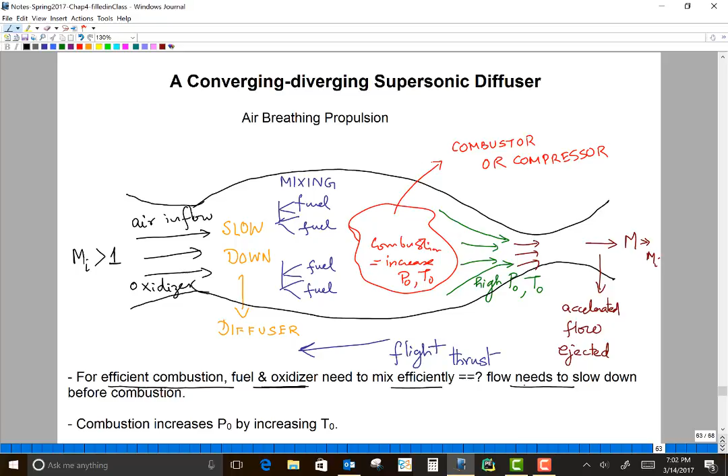So the essential issue in air breathing propulsion is this, right? You're taking in air from the outside, and this flight is already operating at supersonic speeds, say, okay? So then it is taking in air that is at supersonic speeds. And for combustion to happen, for the combustion process to be efficient, let me write it, let me underline these lines. For efficient combustion, this fuel and this air need to mix efficiently, which means the flow needs to slow down. Only then they can efficiently mix with each other.

And obviously, once the air slows down, it can mix with the fuel and undergo combustion, which increases T naught, which in turn increases P naught. This P naught accelerates the gas through the converging diverging nozzle, thus converting a large stagnation property isentropically into a larger amount of kinetic energy because of the nozzle. So that's what we learned, right?

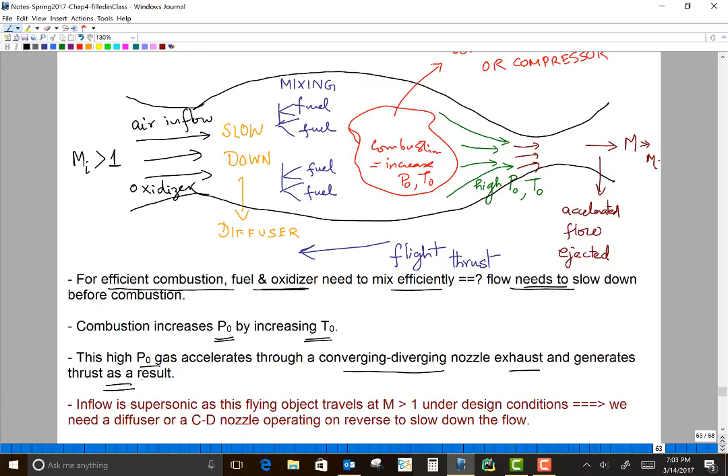The Mach number is essentially the relative proportion of kinetic energy to internal energy. So this gas that just underwent combustion will have a lot of internal energy, and now you push it through a converging diverging nozzle, it's going to convert a lot of that internal energy into kinetic energy, and hence a lot of momentum and hence thrust. So that is the essential idea of a converging diverging nozzle based thrust generation system, and generic idea for any such propulsion systems. So the inflow is supersonic, so you need to slow down the flow.

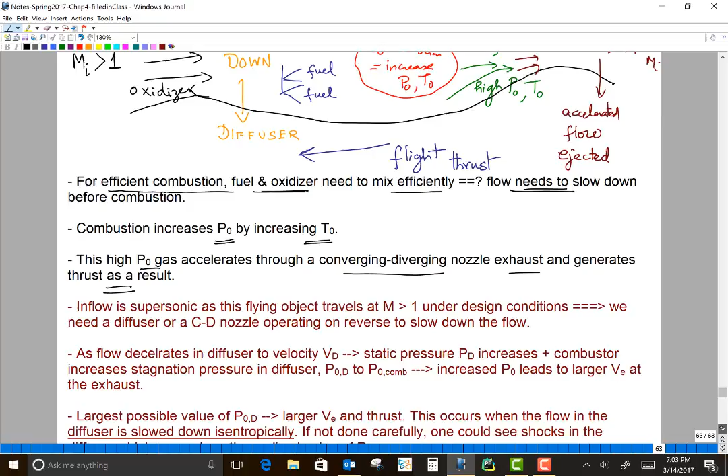And what are the mechanisms that you can slow down the flow? You can just block it, right? I mean, you can just block the flow. And as you block the flow, or you can constrict the flow, it's not going to be that easy because it's at supersonic speeds, so it won't sense the constriction. So the only response this flow is going to have is to undergo a shock and convert the flow into a subsonic flow behind the shock, which in turn is going to sense this constriction and try to slow down.

The problem with this approach is you want your combustion process and the energy addition process to be efficient, right? So now you have this inflow that just underwent a shock to slow down, which means you're losing a lot of the P naught or the stagnation pressure associated with the inflow.

Now you lose a lot of this P naught, then you take this residual flow with reduced P naught, then you need to add that much more fuel and burn that much more fuel to increase the P naught to the value that it originally had, the value of the incoming flow. Okay, and then on top of that, you need to burn more fuel to increase the P naught further, so that you can generate increased momentum and hence increase thrust.

So the basic idea here is, how can we slow down the flow efficiently without losing any of the P naught that is inherent in the flow, that is generated because the flight is already operating at supersonic speeds, right? So you don't want to lose all that incoming momentum. You don't want to kill all that incoming momentum in the air.

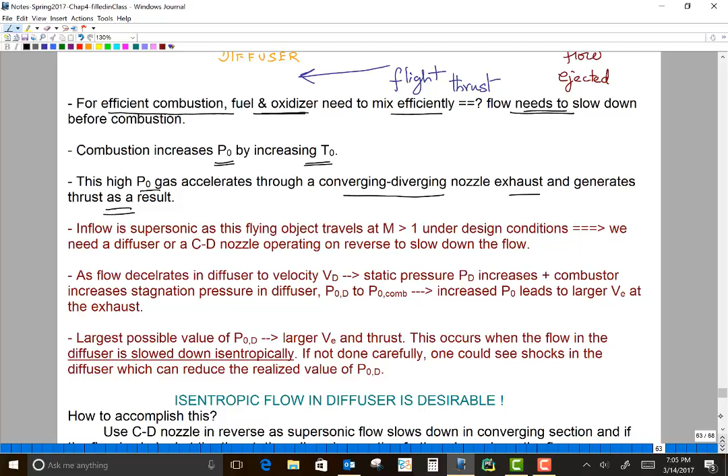You want to store it as internal energy, and the way to store it is to isentropically slow it down into a stagnation state. And how do we isentropically slow down the fluid? The way to do that is to use a converging diverging nozzle in reverse.

So which means now you have supersonic inflow and you have a converging section. The supersonic inflow is going to slow down through that converging section, and if it is operating at what is called a design condition, then you could in principle choke it at the throat, and then in the diverging section, the flow can either accelerate or decelerate, right? And most probably in this case, it is going to decelerate further into subsonic flow, simply because the back pressure in the combustor is going to be high enough to warrant a subsonic flow.

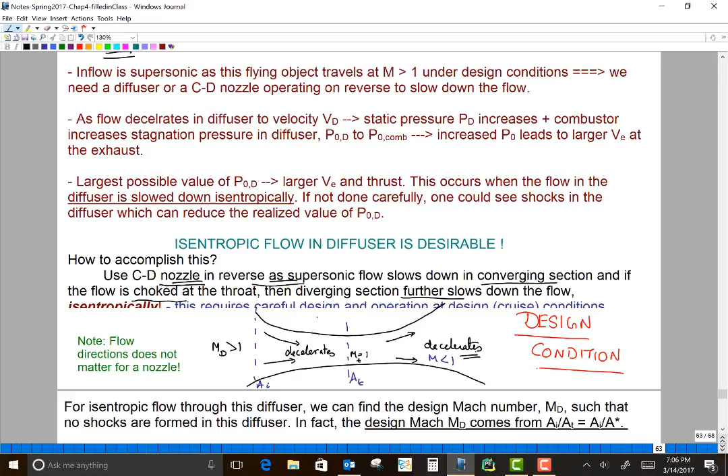So when that happens, the flow is going to slow down isentropically into a subsonic flow, and at that point you can have a very efficient way of mixing the fuel and the oxidizer so as to have a very efficient combustion process. The problem is the following, okay?

So if you're using a nozzle like this, then there is a design Mach number, MD, that is associated with the nozzle, right? If AI is the area of the inlet and AT is the throat area, then this AI by AT is going to give you the nozzle shape, and there's a characteristic supersonic Mach number associated with this nozzle design, that you can get from your isentropic flow tables. So for isentropic behavior, this AI by AT will give you a design Mach number. In any of your problems, your design Mach number MD and the area ratio AI by AT are equivalent pieces of information.

And so only if the flight is traveling at this design Mach number would this nozzle work, because then it is operating at the design Mach number, which means this nozzle designed for this Mach number can isentropically slow down this fluid. However, it is not possible to operate under design conditions all the time.

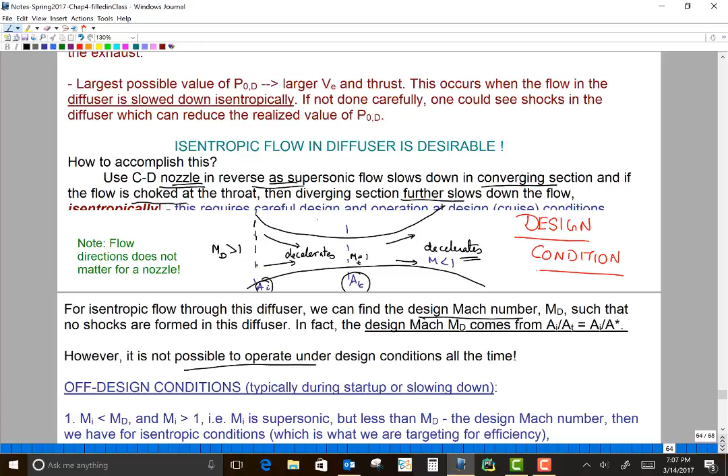For example, one of the most prevalent off-design conditions is what occurs when you typically start up the flight, or when you're trying to slow down from your cruise speed, okay? So either you're accelerating towards your cruise speed or slowing down from your cruise speed, right? So what happens? It is at these times that the combustion process becomes very inefficient. And in this day and age, when there is so much effort to reduce carbon emissions and all that, then this becomes a key issue, okay?

So let's look at the situation when you're operating in an off-design condition during the startup phase, which means let the flight be operating at a Mach number MI, which is smaller than the design Mach number, right? Okay, so the design Mach number can be viewed as the cruise speed. And this MI is something smaller than the cruise speed, but this MI is supersonic, so it's greater than 1. What happens if it's subsonic? Then subsonic is not a problem, because subsonic can sense this obstruction from the combustor, and it can slow down accordingly and isentropically.

The problem with this is always with the supersonic flows, because a supersonic flow cannot sense an obstruction, and if there's an obstruction, then the only way it will slow down is through a shock. And the shock is a non-isentropic process, and that is where the issue is.

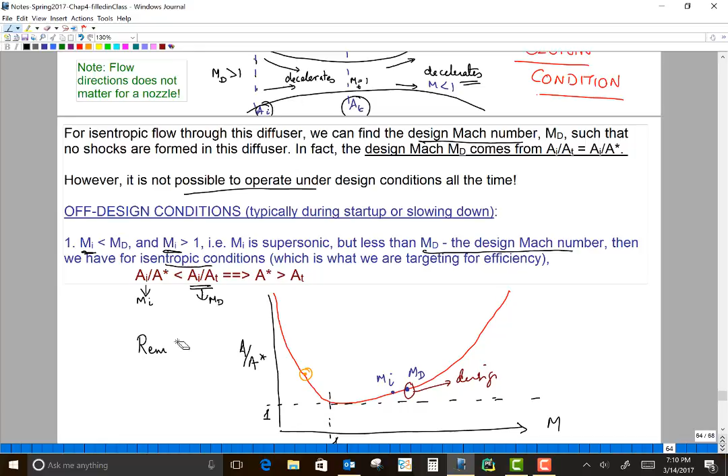But now you're operating at M_I, which is smaller than M_D, which means the corresponding area ratio for M_I is going to be A_I by A star, okay? So let me write it this way. Let's remember this plot, which we looked at maybe a month or so ago. This is the relationship between A by A star and Mach number, okay? So if this is A_I by A star, then this is M_I, for different values of Mach number.

And what we observed is that for a given value of A by A star, there are two values of the Mach number, one subsonic and one supersonic, right? And this M_D, let's call this the design. This is A_I, then this corresponds to A_I by A_T, where A_T is the throat area, which also happens to be the A star for the design condition, right? And then, let me use a green color. So this is the design Mach number. This is the current operating Mach number, M_I.

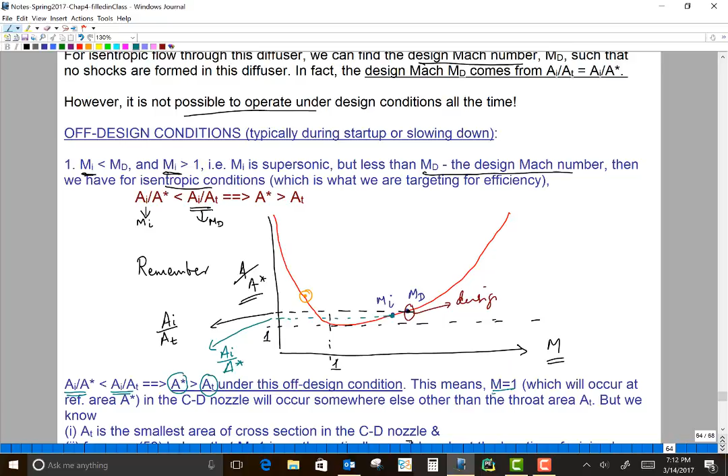And if you plot the A by A star, then this is going to be A_I by A star, okay? And M_I is less than M_D. That is the condition that we are looking at. So M_I is slower. The current speed is slower than the cruise speed. Then if A_I by A star is less than A_I by A_T, it's easy to infer that A star, the effective reference area for this operating Mach number M_I, is greater than the design reference area, which is A_T, the throat area. So the A star for this off-design condition is greater than the A star for the corresponding design condition. This means for this nozzle, the M equals 1, or the sonic flow, which was supposed to occur at the throat, would now occur at an area of cross-section which is larger than the throat area.

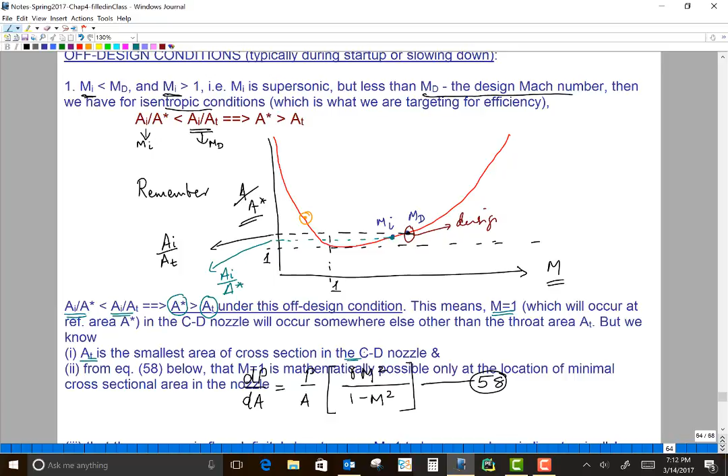The problem is that your M equals 1 cannot occur anywhere. I mean, it needs to occur where you have some kind of an inflection in the area variation, right? So your dA by dx should be 0. That's the only place your M equals 1 can occur. Okay, that's the first one. The second one is A_T is the smallest area of cross-section in the converging-diverging nozzle. Now you just cannot have M equals 1 anywhere else.

Okay, so what this means is, in order to slow down the supersonic flow from M greater than 1 to M less than 1 into a very weak subsonic flow, you need to cross the region of M equals 1 somewhere in between, okay? Or you should have a shock. So if you were to do it isentropically, then your M should equal 1 somewhere, right? Otherwise, you're going to have a shock. And what we are realizing is when A star is greater than A_T, there is no location where M equals 1 can occur, which means the only mechanism for this fluid to slow down is through a shock.

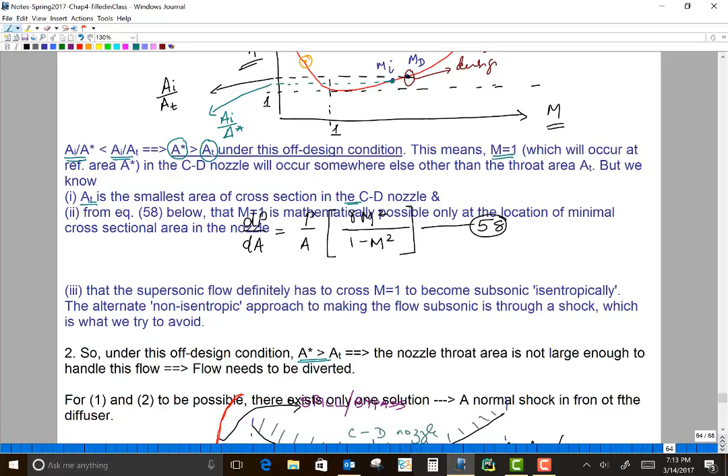So what happens in reality is if you have M_I less than M_D but still supersonic coming in, and you have a nozzle that was designed for M_D, then what you're going to end up with is a big red normal shock in front of this nozzle. And behind this normal shock, you're going to have a subsonic flow. So here M1 equals M_I, and then here you're going to have M2, which is less than 1, right? Which means if A1 star is the reference area for this supersonic flow M_I, then A2 star is going to be the corresponding reference area behind the shock, right? And what did we see?

Whenever you have a shock, the A star increases across the shock, right? So A star increases across the shock. Why? Because A1 star by A2 star is P naught 2 by P naught 1, okay? And P naught 2 by P naught 1 is less than 1, which means A2 star is greater than A1 star. So the A star, or the reference area, always increases across the shock.

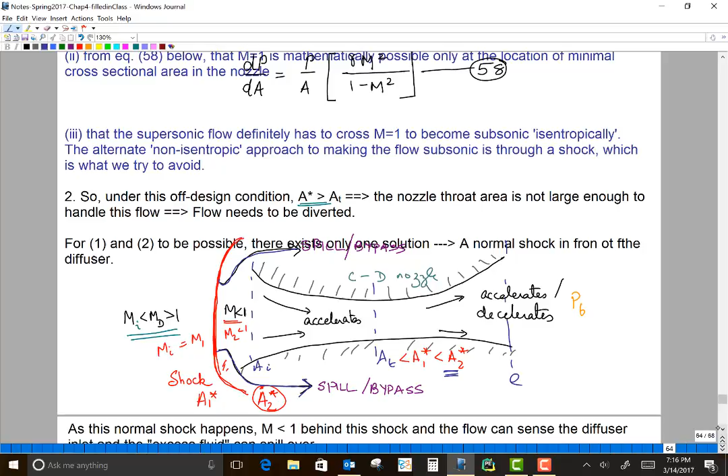Okay, so all kinds of things can happen. So this is the typical response, and obviously the problem with this approach is you have a shock, and the shock is going to result in a loss of stagnation pressure. And so the approach to overcome this deficiency of the design is what is called the overspeeding maneuver.

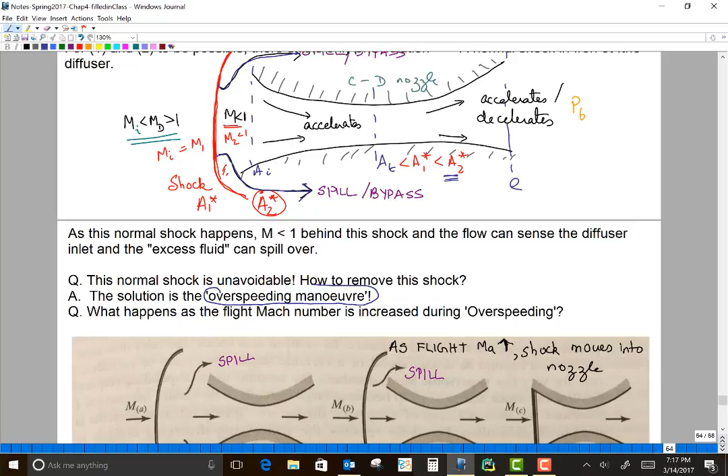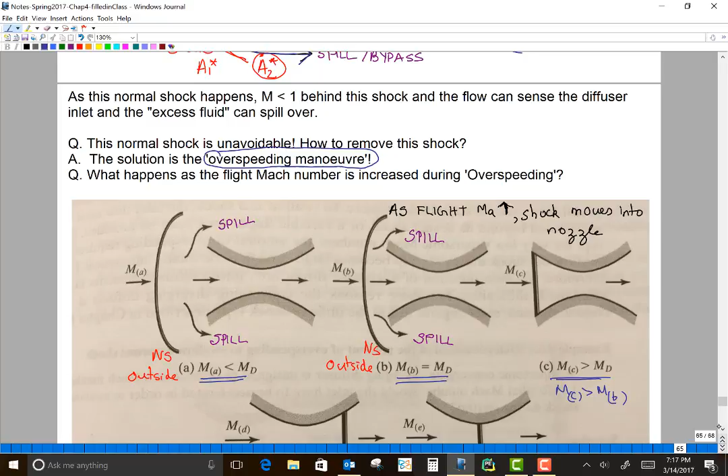So if you're operating at a Mach number that is less than the design Mach number, then instead of just accelerating to the design Mach number, what you do is you accelerate beyond the design Mach number such that the shock that you're having gets swallowed into the nozzle, and then if you decelerate to the design Mach number, you will be able to remove the shock in its entirety, and I'm going to show you the mechanism of that. Okay, say MA is the operating speed, so this MA is less than MD and it's greater than 1, right? So it's off design but slower than the design condition, but it's still supersonic.

So you're going to have a shock like this. So you're going to have this kind of normal shock in front of this nozzle, and then behind the shock you're going to have subsonic flow, and this subsonic flow is going to result in some extra fluid being spilled or bypassing the nozzle, and then only whatever the nozzle can handle is being pushed through. Okay, so now you have P naught 1, here you have P naught 2, your P naught 2 is smaller, so it's going to handle the rest of the fluid.

Okay, so now let me increase my MB. My MB is greater than MA, okay? And this is going to be equal to MD, or my design Mach number. So now I'm increasing my Mach number to the design speed. When this happens, the shock doesn't go away. What happens is now my shock already exists, and this shock is going to get closer to this nozzle, and there's going to be less spillage.

Okay, there's going to be less spillage because my A star is now closer to the A_T, but the shock is not going to vanish all of a sudden, right? The shock still exists. So the shock is going to get pushed to the right, closer to the nozzle.

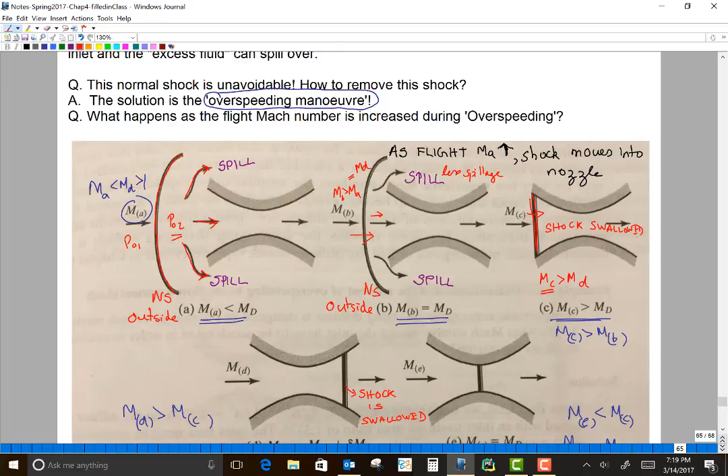And if I increase my Mach number to slightly greater than MD, so this is a very small number, if I slightly accelerate the flow, the shock that was here goes here. Okay, the shock goes there, and now my ME is the final stage where I decelerate. So all of this is accelerate, this is accelerate, this is accelerate slightly, and this is decelerate to MD. When I decelerate, the shock that was here moves back into the throat region.

And at the throat region, what is the Mach number? M equals 1, right? So M equals 1 is the Mach number at the throat, which means the shock that you have is the weakest shock, and which means you basically get rid of the shock and you get an isentropic flow. So this is isentropic flow, okay? So this is what is called the overspeeding maneuver.

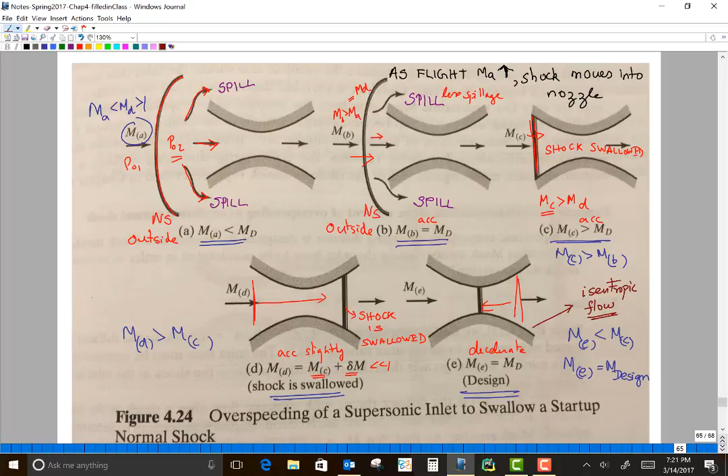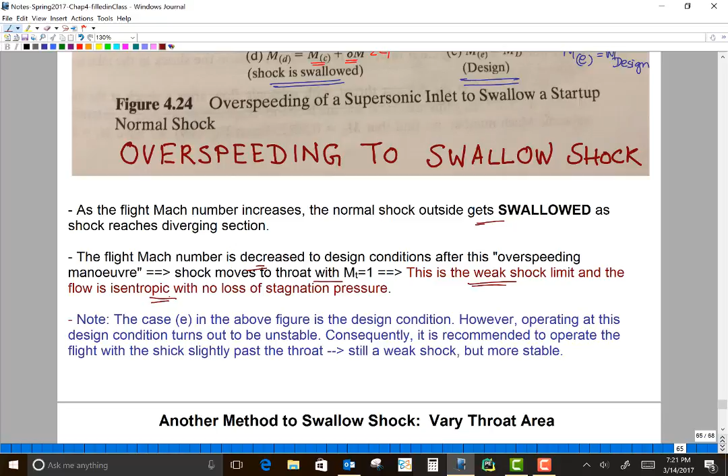When we meet next time, you can ask me the relevant questions regarding this material, but there's a lot of discussion about this in the textbook, okay? So now what you have is an isentropic flow here. This is called the overspeeding maneuver. So as the flight Mach number increases, the normal shock gets swallowed, and the flight Mach number is finally decreased to design conditions after this overspeeding maneuver, which means the shock moves to the throat with MT equals 1. So this is the weak shock limit, and the flow is isentropic with no loss of stagnation pressure.

There's a note given in your textbook which I think is relevant. The case E in the above figure is the design condition, which means it's purely isentropic. However, operating at this design condition turns out to be unstable. What this means is any small change in Mach number is going to result in an off-design condition, and the shock that is at the throat right now and is an infinitesimally weak shock is going to all of a sudden come out and become a very strong shock outside.

Okay, so consequently, the recommended operation procedure is to operate the flight with the shock slightly past the throat. I'm sorry for the typo. That is, if this is the nozzle, then you operate such that the shock is somewhere here, which means it is still a weak shock because here M is 1, right? But here M is probably 1.1 or something like that. So it's still a weak shock. There is going to be a little bit of momentum loss and stagnation pressure loss, but it's not as significant, and this is a more stable situation to operate in, okay?

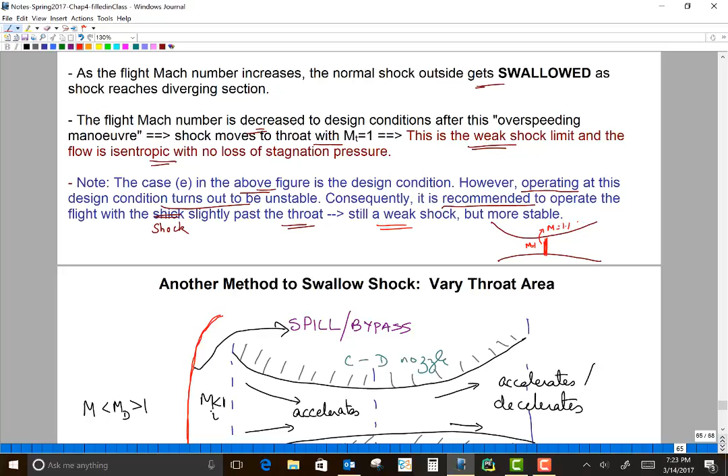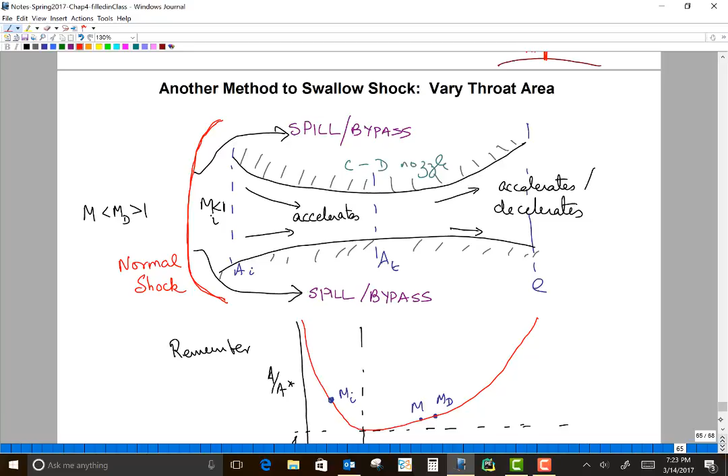There's another method to swallow shocks, and this is a more common approach in the current day of active control technology. So the basic idea is, if you're operating in the off-design condition, this is MI, then MI corresponds to AI by A star, this corresponds to AI by AT, and by design, AI by A star is less than AI by AT for isentropic flow, which means A star is greater than AT, okay?

So if you are operating in off-design condition, the converging diverging nozzle is not large enough to support this flow, and the only way the flow can respond, since the incoming flow is supersonic, is by having a shock in front of the nozzle, which results in a subsonic flow behind the shock. The subsonic flow also cannot pass through this nozzle, so part of the subsonic flow spills out, and whatever flow rate the nozzle can support passes through the nozzle.

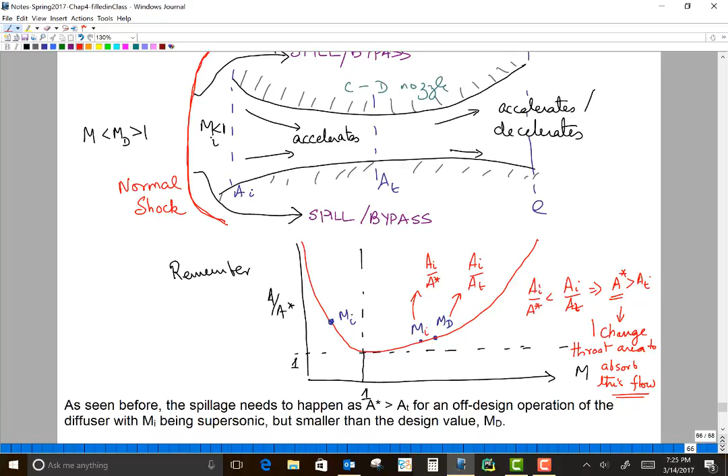So now, instead of accelerating this flight beyond the design Mach number and then slowing it down to the design Mach number, which is called the overspeeding maneuver, the other thing that you can do is change the throat area to absorb this flow. This is the second approach.

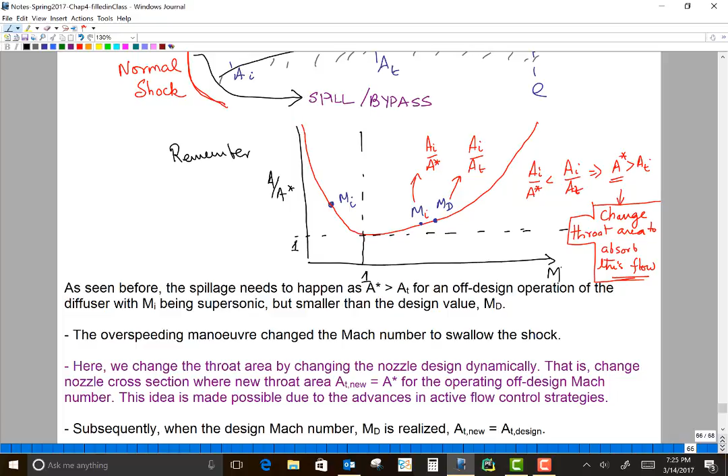And the way to do that is the following. Let me put this M somewhere here. So this is my Mach number axis. Imagine this is the off design case. So this is my MI. So MI is less than MD, that is, it's slower than the design Mach number, and MI is still supersonic.

Then I'm going to have A1 star, which is the reference area in front of the shock, and I'm going to have a shock, and behind the shock I'm going to have A2 star. So we're going to have the following gradation in the reference area. My A2 star is the reference area behind the shock for isentropic flow. It's greater than A1 star, greater than AT. If you take the isentropic flow behind the shock, then A2 star is the location at which Mach number will be 1. And obviously, since A2 star is greater than AT, the Mach number cannot be 1 for that flow.

So what will happen is some of the flow will go through this nozzle, and some of the flow will be spilling out. So you're going to have what is called spillage. Whatever can pass through this throat area AT is what is going to pass through. So the approach is, if you have this starting state, this is A0, the throat area. This is A0 equals AT. So AT is your starting throat area.

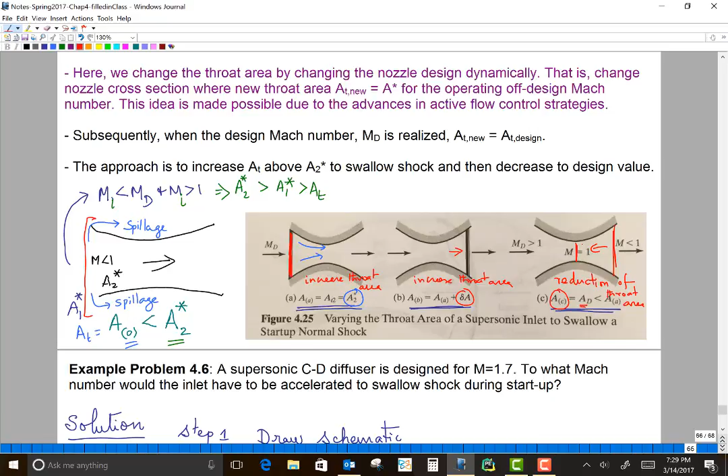And now I change my throat area to match the design condition, which is smaller than my AA. So this is the reduction of throat area. This is increase throat area. This is again increase throat area. So this is what I'm doing. I'm increasing throat area once to swallow the shock, then I'm increasing it slightly more to push the shock downstream so as to make this shock system stable, and now I reduce the throat area to my design value, and basically my shock that was here moves to this location, and at that location M equals 1, which means what you have is an infinitesimally weak shock. So this is called changing the area of the throat to swallow the shock.

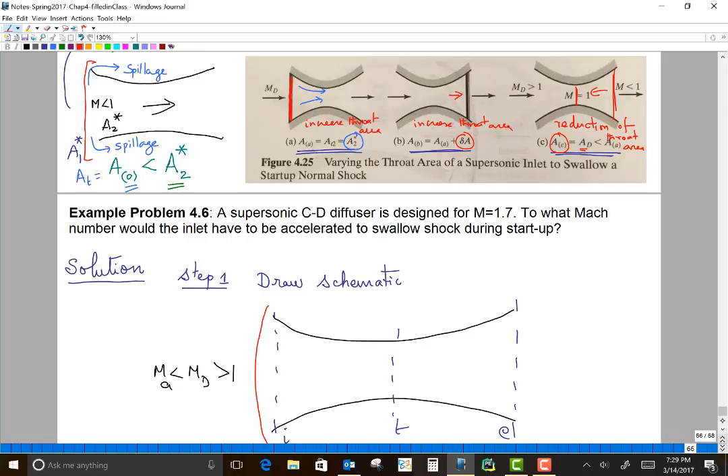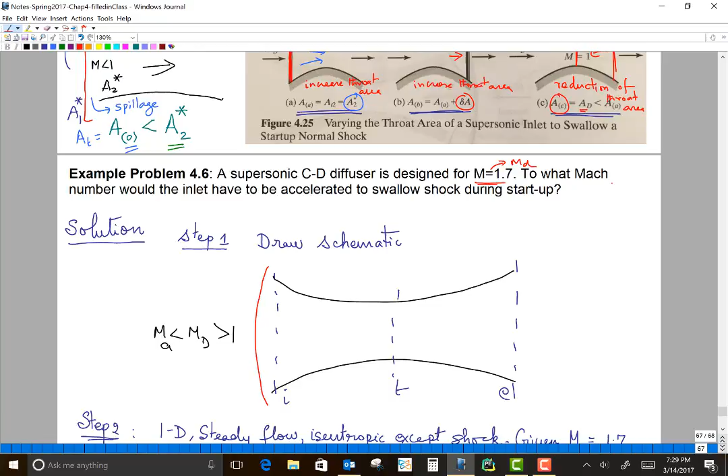So there's an example problem in your textbook that I just want to quickly go over. Let me just go over this solution quickly. It's an easy problem. What you have is a supersonic diffuser that is designed for M equals 1.7. So this is my MD. To what Mach number would the inlet have to be accelerated to swallow the shock during startup? So this is basically the overspeeding approach, right?

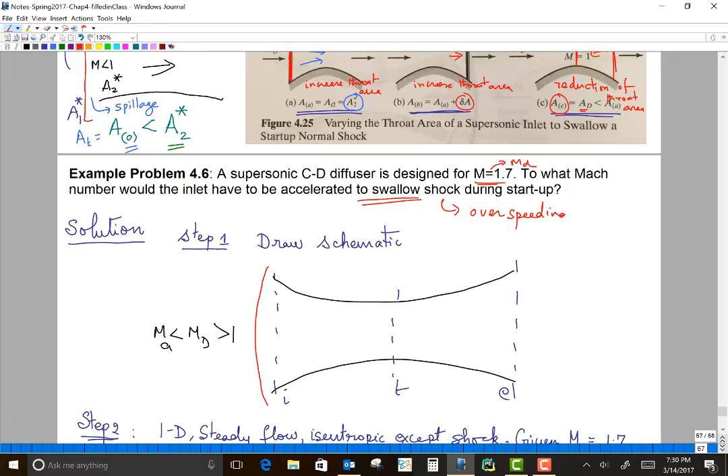Okay, this is the overspeeding approach. So you can draw the schematic. So this Mach number, obviously, this overspeeding is required only when you are operating in an off-design condition. So MA is less than MD, which is equal to 1.7, and obviously that's greater than 1. So MA is somewhere between 1 to 1.7. That's the condition under which such a flow would happen. So obviously this is steady 1D flow, isentropic, etc.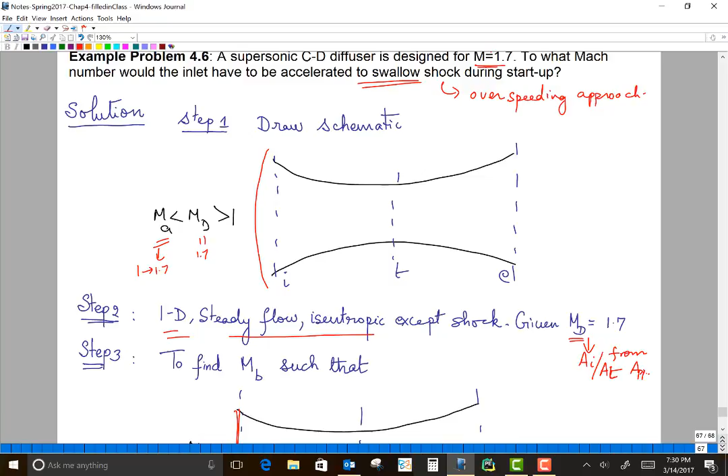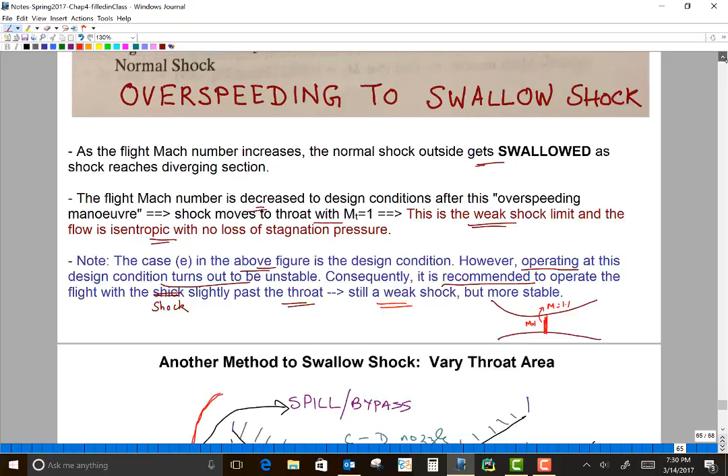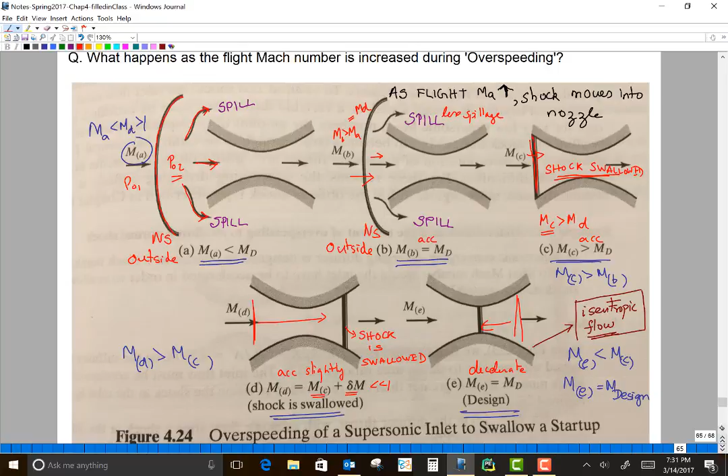So we already know MD is 1.7, which means from this I can get AI by AT, which is the design nozzle shape, right, from Appendix B. So the basic idea is we need to find MB which corresponds to this image. Let's look at this image. The swallowing of the shock corresponds to this image C, right? So this is the swallowing of the shock, the first case when the shock is swallowed.

So you want to find out what is the Mach number in front of the nozzle here. What is the Mach number of this flow, MB, such that this MB is obviously going to be greater than MD for this shock to be here, right? If the shock is here, then obviously you're going to have subsonic flow behind the shock, right? So let's solve this problem. Let's do the final solution for this problem.

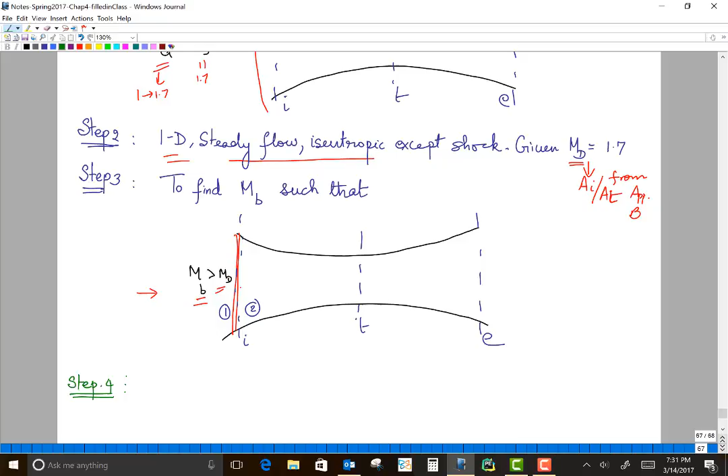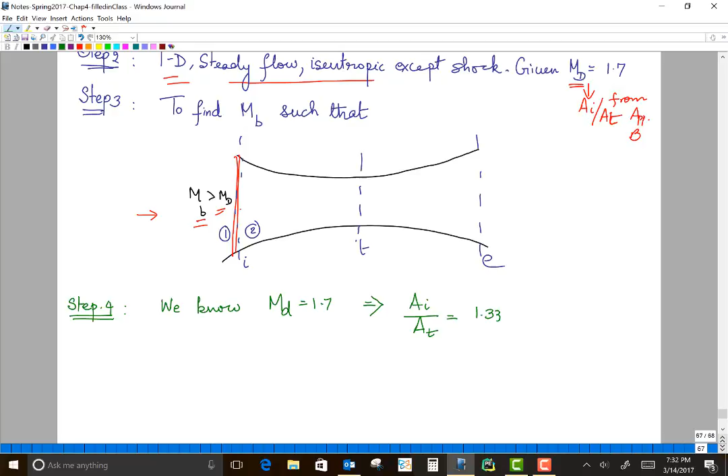Obviously, in all your homeworks, it's important that you write out the problem statement in a nice way and clearly specify what you're trying to do in your homework problem. Okay. So the final solution step is the following. Now we know MD equals 1.7, which implies AI by AT is going to be 1.3376, right?

Now, what is going to happen is you have a shock here. Now after overspeeding, if it's really confusing to you, I suggest you rewrite this as MC. So you have to find this MC, right? So after overspeeding to MC, the shock is at the inlet plane. So behind the shock, you're going to have a 1 star here and a 2 star. And obviously if you have a shock in this nozzle, then this flow is choked, right? So your A2 star equals AT, correct? So A2 star equals AT.

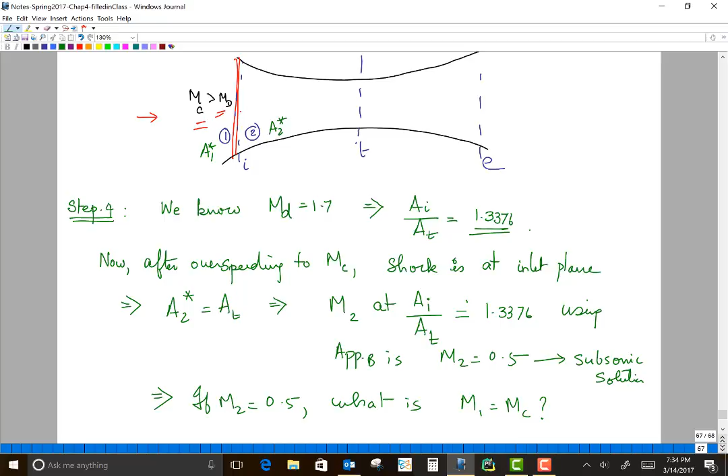Which implies that M2 at AI by AT, where AI by AT is 1.3376, using Appendix B, is M2 equals 0.5. So this is the subsonic solution. Which implies that if M2 equals 0.5, what is M1 equals MC? What is MC, right? So this you can get by using Appendix C, the normal shock tables, to find the Mach number in front of the shock, and we get MC equals M1 equals 2.64.

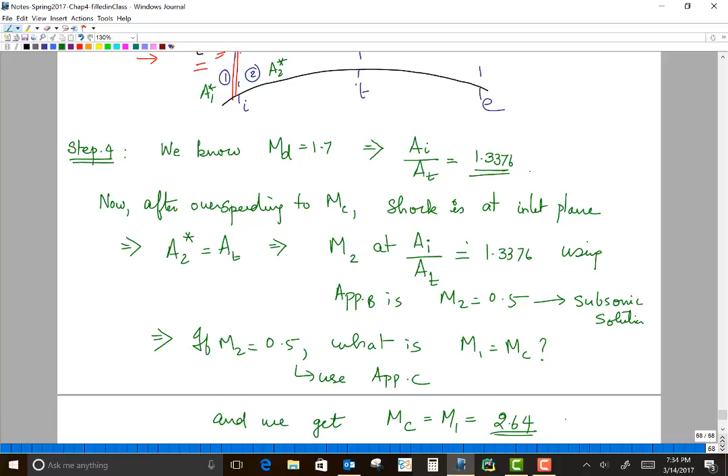So you need to accelerate to a Mach number of 2.64. The key realization here is when the shock is swallowed, you have a shock in the nozzle. And whenever you have a shock in the nozzle, the flow is choked. Which means if you have a shock in the nozzle, then you have this isentropic flow region here, and for this isentropic flow there's only one A star, and that A star is going to be AT, and it's also going to be A2 star. The A2 star is the same as AT.

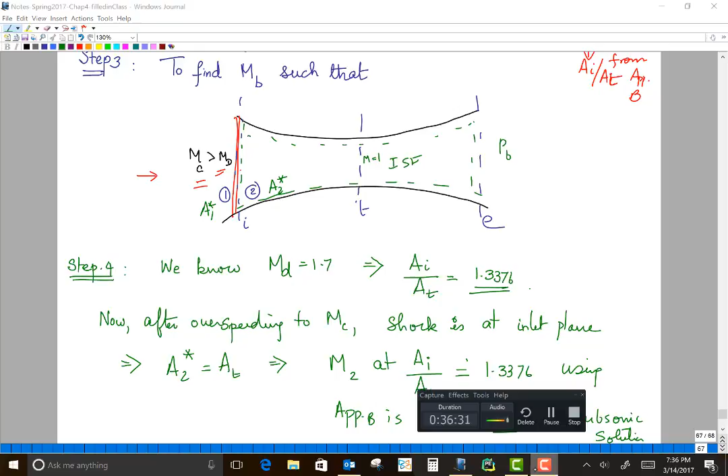So if I know my AI, and the shock is occurring at AI, then AI by AT is going to give me the subsonic flow solution at that location, which is 0.5. And the subsonic flow is accelerating. It will be M equals 1 here, and depending on the back pressure, PB, it will either accelerate or decelerate depending on what value of back pressure you have. So this is the essential method to solve such problems. And I think that brings us to the end of chapter 4. In the next class, we'll try to solve some example problems, and you can also ask me any questions about this material. Thank you.